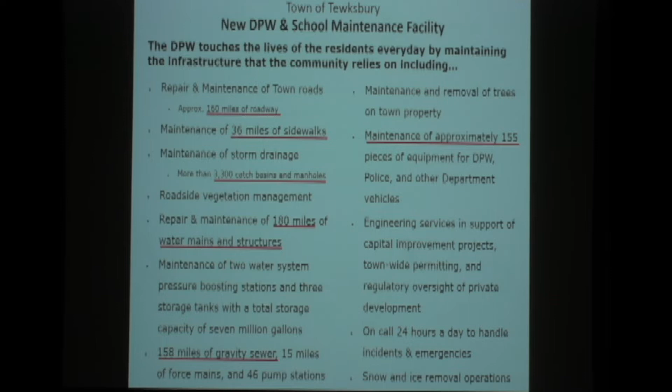They're responsible for the repair and maintenance of 180 miles of water mains and structures, as well as maintenance of 158 miles of gravity sewers, 15 miles of force mains, 46 pump stations. They're responsible for the maintenance of 155 pieces of equipment that are used to maintain this infrastructure on a daily basis, including also being responsible for the engineering services that support all of the capital improvement projects townwide, for townwide permitting and regulatory oversight. And it's important to note that they are on call 24 hours a day to handle incidents and emergencies, and those include obvious snow and ice storms, windstorm cleanup.

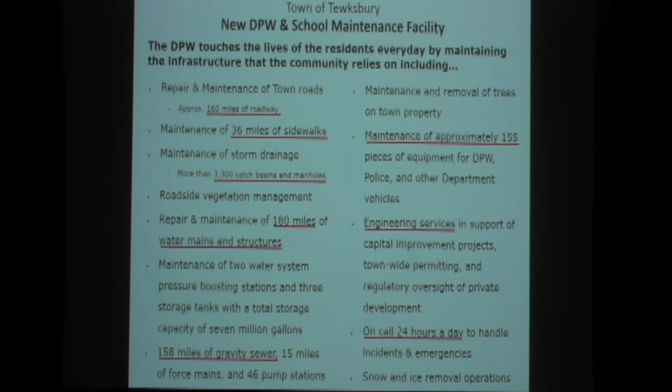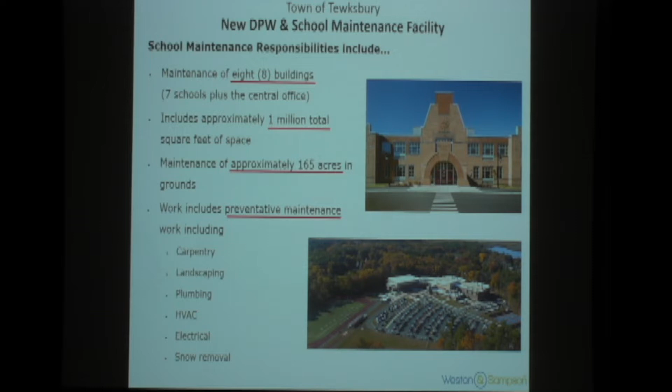They're becoming more and more of a problem, and they're on call 24 hours to keep that infrastructure running and available to the community. So if you look at that list, you think about what you use and what impacts your daily lives, you can really see that they do touch the lives of the residents every day by maintaining that infrastructure. In addition to that, the school maintenance department, they're also responsible for some significant assets within the community, including the maintenance of 8 buildings, and that includes approximately 1 million square feet of space, which is very significant and very critical to the town and the students. They're responsible for the maintenance of approximately 165 acres of grounds, and their work includes preventative maintenance, including carpentry, landscaping, plumbing, HVAC.

So as you can see, these services are very critical to maintaining that significant infrastructure that supports the community. So understanding that allowed us to begin our programming efforts. But prior to getting to the details of that, we wanted to understand, why does the town need a new facility? And for anyone who's had a chance to visit the existing facilities, it is quite apparent that the town is in need of replacing the existing operations and supplementing them. And I just wanted to summarize some of those deficiencies, including the existing facilities are 40 to 60 years old. You can see some of the pictures on the right. As a result, a lot of the significant equipment that is used to maintain the infrastructure of the community is left outdoors. This impacts the life expectancy of the equipment. This impacts response times.

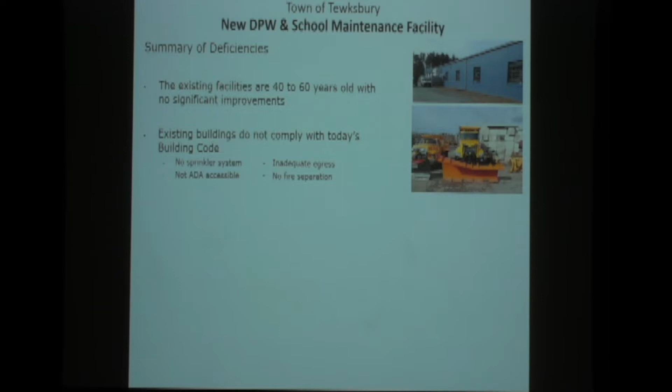This impacts maintenance costs of that equipment, which can really add up over time. In addition, the existing buildings do not comply with today's codes, from sprinkler systems to ADA accessibility to egress and fire separation. The toilet facilities do not meet plumbing code.

In fact, there are no locker shower facilities within the existing DPW facility. And you can see in the photograph on the right that the lockers are actually located in vehicle storage areas. You can see the lockers on the right, and there's the edge of a plow on the left-hand side.

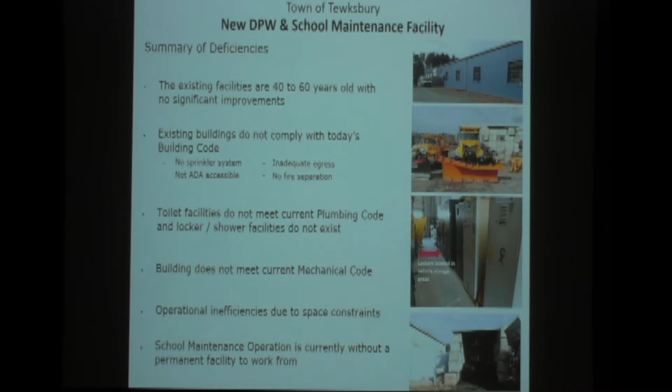And we also found that the buildings do not meet current mechanical code, with equipment being stored indoors, trying to protect that equipment. That is a significant issue for these facilities. And this all results in operational inefficiencies due to these space constraints. And finally, one other very important thing to note is that the school maintenance operation is currently without a permanent facility to work from. And we hope to solve that with this facility.

So I just want to talk a little bit about what is proposed. And this is an aerial view of the existing site. You can see Whipple Road on the right running north-south on the page, and Pine Street is at the bottom of the page running left-right. The main existing DPW facility is shown here in yellow. This is the wing-shaped building that we refer to for the site.

And further into the site are two more buildings. These are existing salt storage structures. One is used for storage of materials, and the further back one is primarily used for salt storage. And then up near Pine Street is the existing food pantry.

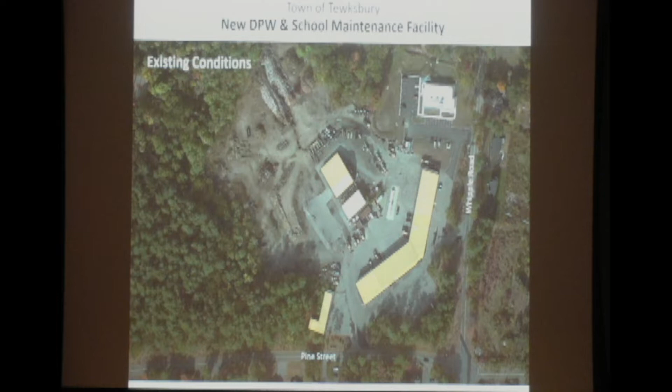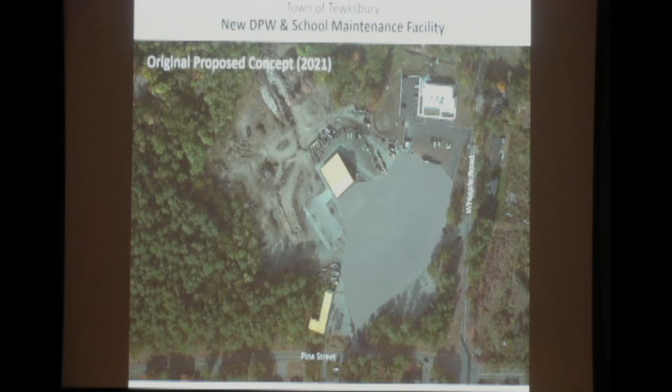Under the original proposed concept, when we began this process, we envisioned that we would wipe the site clean, give us a nice clean slate to work with, and begin developing concepts. We went through the process of programming the facility by meeting with staff to understand their operations, and worked through multiple iterations of concepts to come up with what we felt was the most cost-effective and efficient facility for the town's needs.

When we developed this concept, we also developed some initial cost estimates. Early in the process, we were in the $32 million range as we developed the facility, and as a result of cost increases associated with the pandemic and the pandemic-driven recession, as well as material cost increases and material shortages, that quickly spiked up to about $37 million. And we met with the selectmen, we met with DPW administration and town administration, and realized that that was not a project that the town could support.

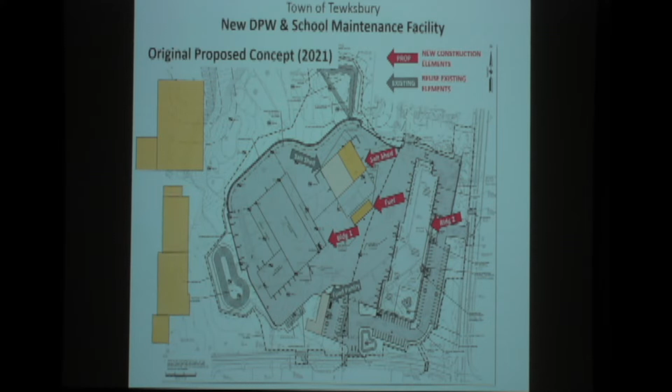What we did is we took a look at this site and came up with a new program that is shown here. And essentially what we did is took pieces of that original program and developed a new operations building, an L-shaped building, and that's shown in yellow as building number one. And so we took pieces such as a portion of the vehicle storage area, we took the vehicle maintenance area, as well as the office, employee facilities, and shop areas. We pieced them together into a main operations building consisting of new construction.

We took the remaining pieces, which essentially included the vehicle wash bay, and we brought that piece into the end bay of the existing building shown in gray, the wing-shaped building, as well as the vehicle storage components, and also incorporated them within the existing building. By doing this, we're keeping a lot more of the assets that are on site and reducing costs associated with new foundations, new structure, things of that nature.

Because of the proposed location of building number 1, in the front of the site, we were displacing the food pantry. As a result, we included some renovation costs within the existing building to replace that food pantry that was going to be displaced by this concept.

So essentially what we have now, instead of a lot of red arrows, we have one red arrow which represents new construction, and that includes stacked vehicle storage, a vehicle maintenance component, shops, and offices and employee facilities, and that's shown by the red arrow on the left. And to the right, building number 2 would be the renovation and reuse of the existing structure, which would include vehicle storage, a wash bay, as well as renovations for the food pantry.

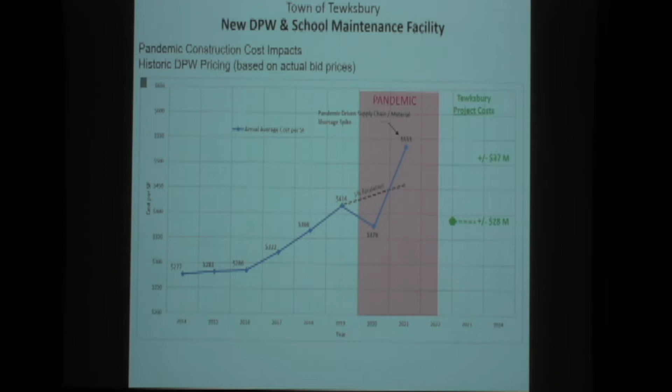As a result, this same project that we were estimating in 2020 quickly jumped to $37 million, as I talked about earlier, which we felt was not a reasonable price to move forward with, which resulted in us working through and coming up with options to drop that $37 million to initially 29.5, and then again through some efforts and a lot of input from DPW administration, school maintenance staff, as well as town administration and the Board of Selectmen, we dropped it further to the $28 million mark. So that $28 million was representative of a very early concept at the time when we presented this about a month ago to the Selectmen.

So just as a very quick history, August 2020, and I'll refer to the numbers at the bottom, approximately $31 million. May 2021, that same project spiked up to about $37.4 million, primarily driven by the supply chain and material shortages and the market conditions. So through the process of developing that revised concept, we were able to initially drop that down to $29.5 million. And that was an adaptive reuse concept that primarily used that existing building to house some of the operations.

And then in August, last month, or early August, we developed another estimate that brought us down to about $28 million. Now this represented a total project cost reduction of about 25% through these cost control measures and the adaptive reuse of the building. But we were working at a very conceptual level, and we felt because of the changing market conditions, it would be prudent for us to really work closely with an independent cost estimating firm to evaluate the concept that was developed, to make sure that it was in line with the $28 million, which the town felt at the time was achievable.

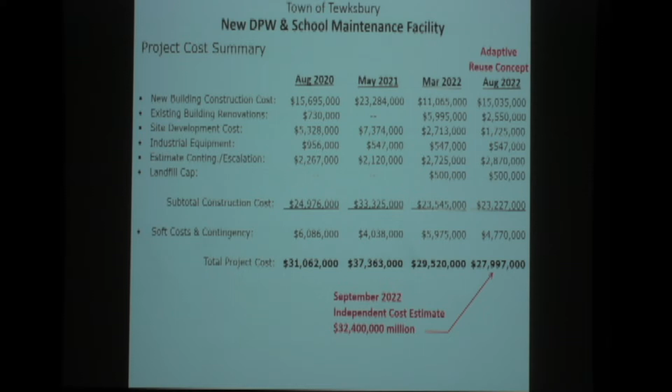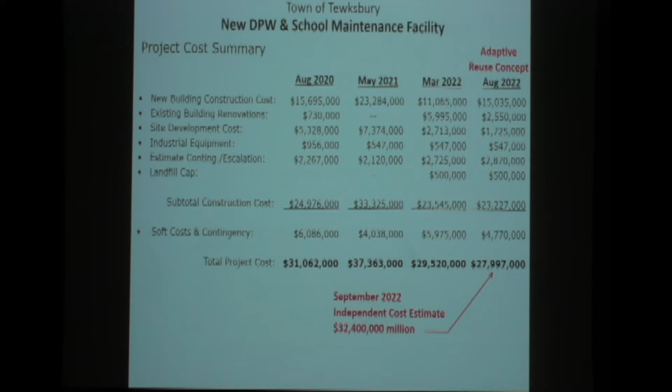Through that process, we received an independent estimate for that initial concept. It was about $32.4 million. And understanding that we want to work towards that $28 million mark, we took another look at that concept and came up with a few more modifications that I wanted to just walk you through that brings us to the final concept that's being presented this evening.

We also looked at maintaining the existing DPW engineering and office area. They're currently using that space. It's a prominent front-facing space, and it was determined that we could continue to reuse that with some minor renovations, some paint, some flooring, some minor upgrades. And that would essentially reduce the new construction cost of the L-shaped building. So we take that piece, put it back to where it is currently, renovate that space, provide some minor upgrades, and allow it to continue to be used. And that reduces the new program.

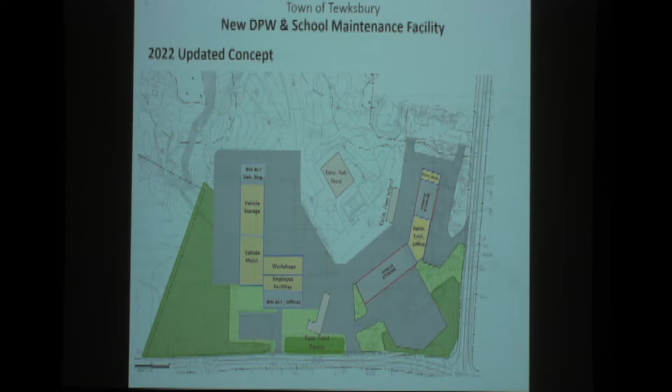So this is the preferred plan, now showing some of the limits of pavement, showing that we have a new L-shaped construction operations building on the left, which would include employee facilities, workshops, maintenance, and a portion of the vehicle storage. And then the existing building would continue to be used primarily for vehicle storage and potentially renovation for office space.

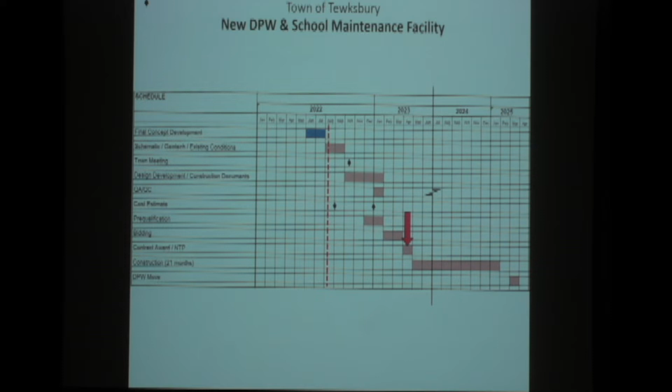And so tying that into where we are today in September 2022, we're working through the process of developing design, and we'll take it through town meeting's approval. We'll then take the project through full design. That'll allow us to bid the project in the April-May timeframe, and then move forward with construction in the May-June timeframe with a notice to proceed.

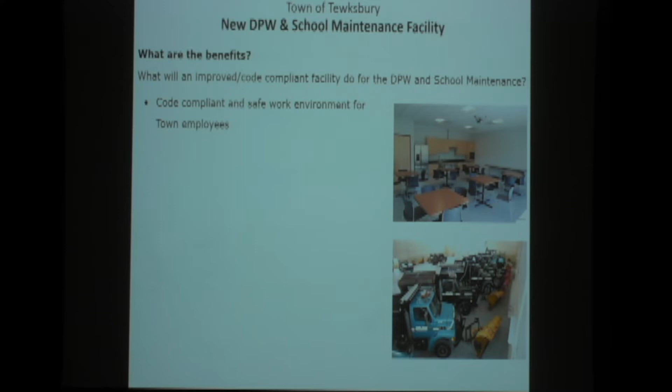I just want to close with a few things, both on benefits and sustainability. Starting with benefits, there's certainly a tremendous amount of benefits that this facility will bring to both the DPW and the school maintenance departments. And some of them include the code compliant and safe work environment for town employees, as we talked about earlier with some of the deficiencies. They just don't have those facilities that are code compliant and safe, and it really impacts their efficiency of operations.

The new facility will protect the town's multi-million-dollar investment in the vehicles and equipment. I showed you some photographs of some very expensive equipment being stored outdoors, which, as I mentioned, impacts operation, impacts life expectancy of that equipment, and increases maintenance costs. It'll be much more efficient workspace, which allows them better response times to better serve the public. The town wants to see the vehicles and equipment be quickly accessed and out on the road to serve the needs of the community, rather than jockeying them around, trying to get them out when they're needed.

It does create a consolidated public works and school maintenance campus, which will improve overall efficiencies for the departments, and really does provide them with a better ability to share their resources. And it will result in the reuse of the existing building, as I mentioned, through the concept development, reducing construction costs. There are also some green and sustainable design opportunities that we're considering through this process.

There's a tremendous amount of natural daylighting opportunities, which will reduce the need for artificial lighting. So if we can bring that natural light in and put in some sensors that turn off the lights, we can save some costs on energy. And then we'll design the building as a super insulated building, which is really just a cool way of saying we'll add some extra insulation to that envelope to save energy costs long-term, anywhere in the 20 to 35% more than code.

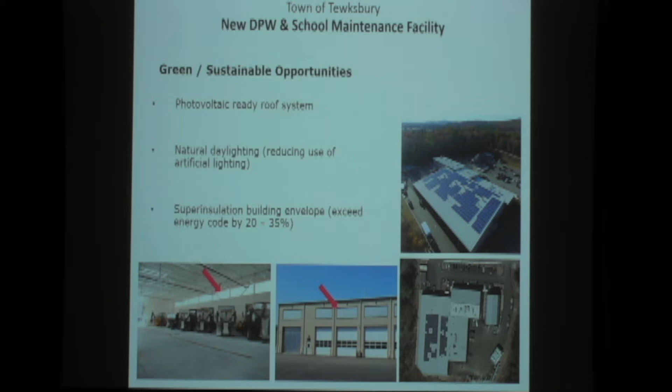There are some other great systems that we'll be looking at for the mechanical systems, high-efficiency mechanical systems, condensing boilers, VRF systems. We are constantly exchanging air within the building because of the industrial nature of the system, so we'll provide heat recovery opportunities.

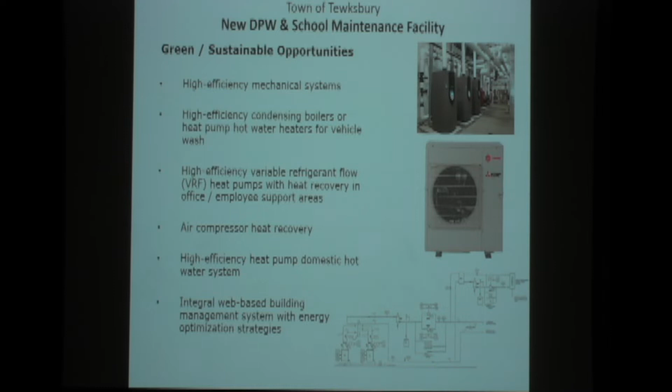And we'll design the controls for the system to be an integral web-based building management system. And it has optimizing strategies where essentially the building learns how to operate itself over time. When is the most efficient time to turn on? When is the most efficient time for nighttime setbacks? These optimization strategies will save the town significant money in the long run.

And then just in closing, it's important to note that if the town doesn't move forward with this project, there are still some significant needs that would have to be addressed. They include the town would need to find a permanent home for school maintenance. I mentioned that earlier, that they currently do not have a permanent home.

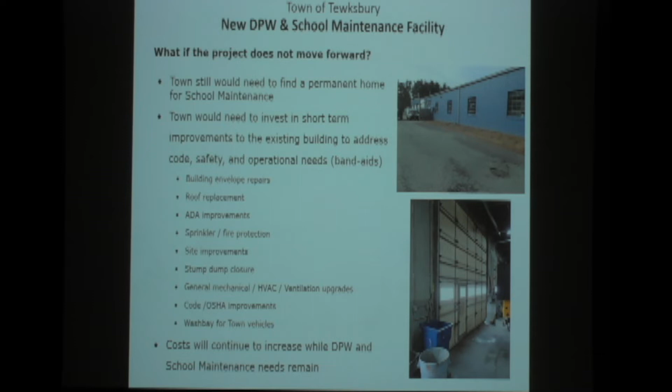And the town would need to invest in short-term improvements just to continue to reuse that building, from envelope repairs to roof replacement, ADA improvements, sprinkler and fire protection systems, site improvements, things of that nature. And more importantly, as we have seen costs increasing, the longer we wait, the cost will continue to increase. But the DPW and school maintenance needs will remain throughout.

So that's an overview. I know I went through a lot of detail, and I'm happy to circle back and answer any questions or call up any slides if people have a specific question on it. Thank you.

Article 4, we'll be seeking to use free cash in the amount of $1.5 million to pay for engineering and design to get the project out to bid, and any remaining funds will pay for construction and project management. And then Article 5, at town meeting, we'll ask for authorization to allow the selectmen to borrow $26.5 million. The total amount to be spent on the project between Article 4 and 5 is the $28 million that was mentioned in the PowerPoint presentation.